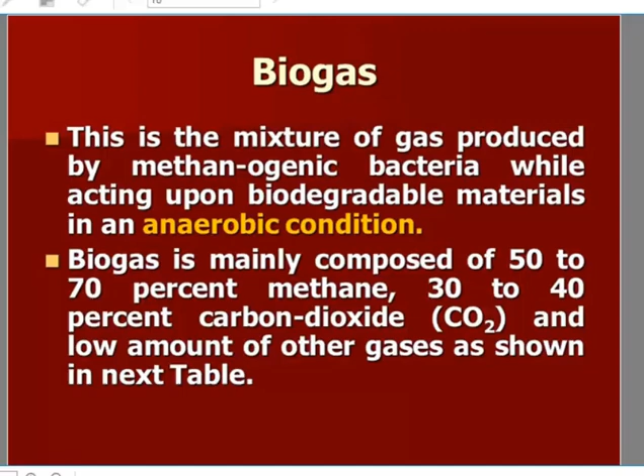One more thing is that biogas is 20% lighter than air and has an ignition temperature in the range of 650 to 750 degrees centigrade. It is odorless, colorless, burns with a clear blue flame similar to LPG gas, and the calorific value is approximately 20 megajoule per meter cube, burning with 60% efficiency in a conventional biogas stove.

So from the calorific value point of view, it's also having values like that. In charcoal you are having approximately 23 to 33 megajoule per kg calorific value. Producer gas is 3.5 to 5.5 megajoule per meter cube. Biogas I have given here as 20 megajoules, and methane is 36 megajoule per meter cube.

Ethanol is 30 megajoule per kg. Methanol is 23 megajoule per kg.

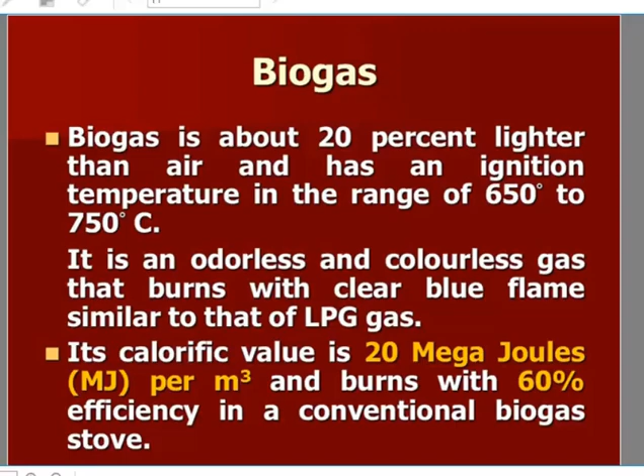Biogas, like liquefied petroleum gas, cannot be liquefied at normal temperature and pressure. Critical temperature is minus 82.1 at 4.71 megapascal pressure.

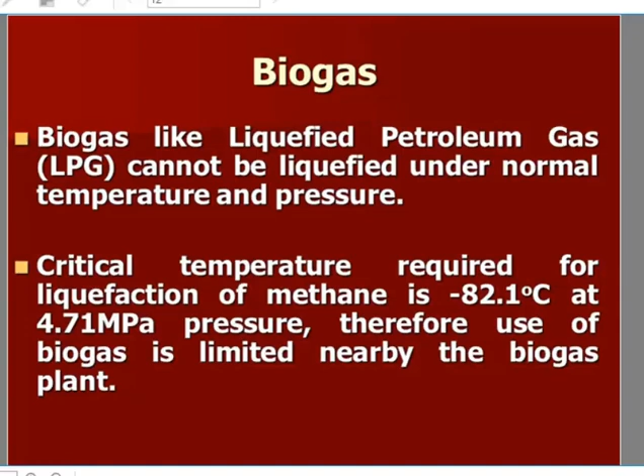Temperature during the process must be 30 to 35 degrees centigrade. pH must be 6.8 to 7.5. C by N ratio should be 20 to 30, and solid content 8 to 10%. Retention time is 20 to 50 days, and it varies from place to place.

So like that, when we are going to have a biogas plant, we have to use the unit. Right now we are also having ready-made available biogas units, made of plastic material and other things, but generally we have to put it into the earth, approximately some feet deep, and then there are several models: fixed dome type, floating dome type, Deenbandhu model. So then we have to connect that to the source.

Every day we have to put the stock in it, like the cow dung cake. So when we are having cow dung, in my earlier lecture I have discussed about the cow dung dried cake which can be used in traditional chulas, which are not good, as a lot of greenhouse gases go into the atmosphere.

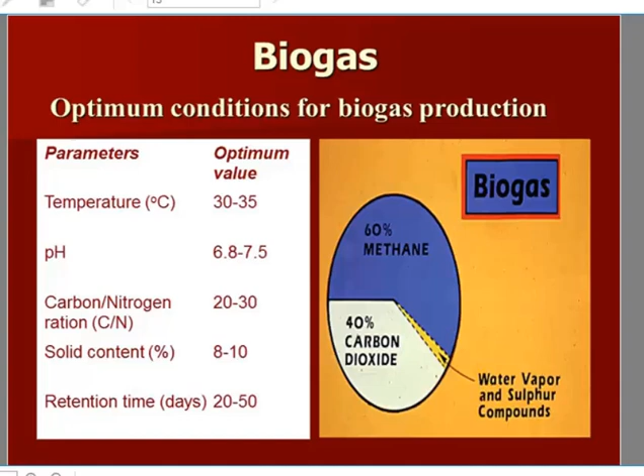Commonly used feed material for biogas generation includes animal waste, human waste, agriculture waste, waste of aquatic organisms, and industrial waste such as from sugar factories, tanneries, paper mills, etc.

If your kitchen area, like in mess areas or hostels in an industrial area, we can connect such areas to the biogas unit. After meals, lunch, dinner, breakfast, a lot of food generally goes to waste, and we have to collect this food and throw it out somewhere for feeding to animals, so that two or three people go and throw it where animals can eat it.

If not like that, you have to think about something else. In a traditional home, if you have cattle or buffalo, whatever you have, you put whatever waste material you have into the pot every day, and after 4-5 days when a good quantity is collected, you mix it with the food of the animals, so that waste material can be used as feedstock for the animals.

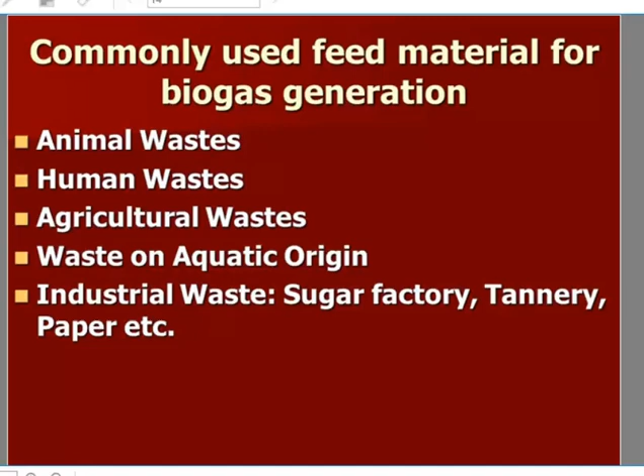In the next slide you can see biogas production potential from different wastes. For cattle dung, biogas production per kg is 40 liters, and methane content in biogas is written here as percentage. So cattle dung gives 40 liters per kg with 60% methane content.

Green leaves and twigs give 100 liters per kg with 65% methane. Food waste gives 160. Bamboo dust gives this amount, and fruit waste gives this amount. Think about the fruit waste number, and now connect this to the municipal corporation.

Every day we are getting lot of food for the selling purpose in the local mandis. Every district headquarter has a big mandi, a place where they sell the product. The product first goes there, and then from that place it is sold to persons. Lot of businessmen dealing in it will go and collect, buy, and provide it to the town areas.

And after that you can see a lot of waste, like in case of banana - you take the banana, eat it, and then put the banana material after eating on the road or nearby corners. So like that, the municipal fellow has to go there and collect it.

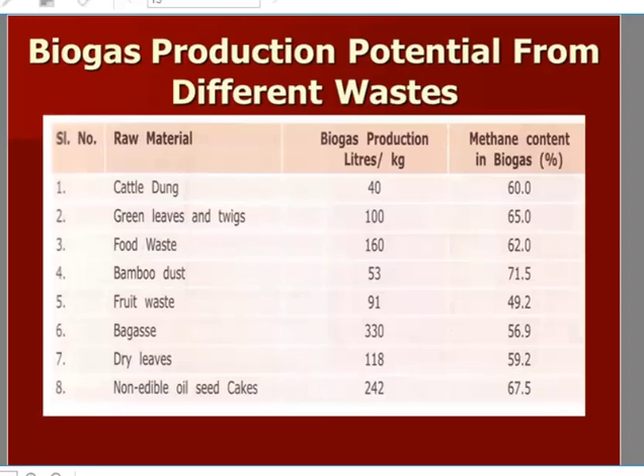Next is power generation. Biogas can partially replace diesel to run the IC, internal combustion engine, for water pumping, and small industries like flour mill, sawmill, oil mill, etc. Biogas can similarly be used to produce electricity. Dual fuel engines using biogas and 20% diesel are nowadays gaining importance.

Second thing is that on a few websites I had seen that biogas can be used in DG sets. It's small scale, like at your home, suppose you are having biogas production like that.

I had seen somewhere they are having lots of plant growth. There is a two-story building, and on the roof they have lots of plants, and they collect the plant leaves and woody material from near the homes, and have a biogas model on top of the roof. They feed it in, and after feeding the biogas production continuously goes on, so they use that biogas to run their DG set, and that DG set produces electricity that can be used.

First thing. Second thing is that whatever gas is there can be used for cooking purposes. That is a two-way connection - one biogas production is there, then they use the biogas, otherwise they can switch to the LPG, and the stove is the same.

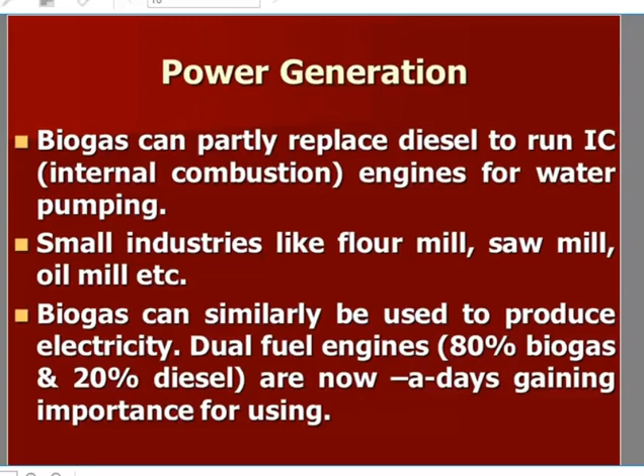So now the biogas requirement for power generation, lighting purpose, that is 200 candle power, 40-watt bulb, two mantle, in the village area where there is a shortage of power. So for that, what they have to do? They have to use that biogas in their Petromax. If you remember, in the villages we used the Petromax.

If you go 20-25 years before, in India in the class two towns, class A, class B, class C, in B or C class towns, the electricity was not proper. So everybody was having the Petromax, based on LPG, and we had to go to the shop. They had so many shops, so you just go and replace the cylinder. That was a 1.2 kg cylinder, and you have to use a mantle in it to solve your electricity issues. If there is no power, you have to burn it.

As soon as the power goes, the matchbox is right there, you light it, and the whole house gets light from it. That was a very common practice, I used to do this too, because we have to do our homework, and during night time if there is no power, then how to do it? That's why we had such kind of preparation, and everybody was having the same. Each household had such kind of arrangement, and some even had two or three.

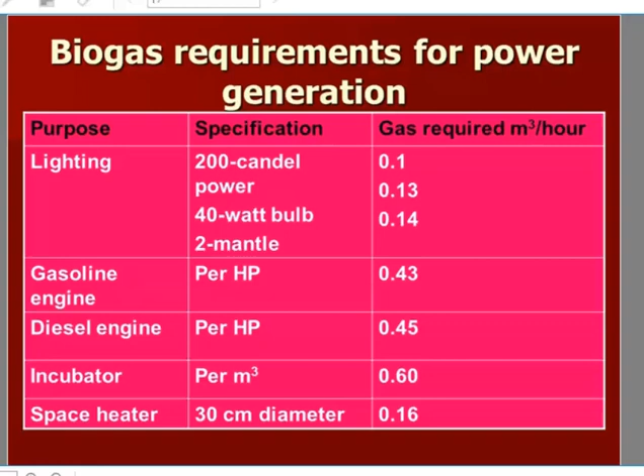Okay, second thing is this diesel engine. Okay, going to the next one. So this is very important. Now I will go to another one, guy.

The important thing is, as I told, when a person goes to collect the cow dung cake, I'm talking about a village area, rural area. If you go there, they have to prepare their meal with the help of the traditional chulha, a device made of bricks with a proper arrangement of mud. So then they have to burn wood as well as the cow dung cake. Wood is generally not available all the time, but cow dung cake they have, and many neighbors nearby having cattle also have the cow dung cake.

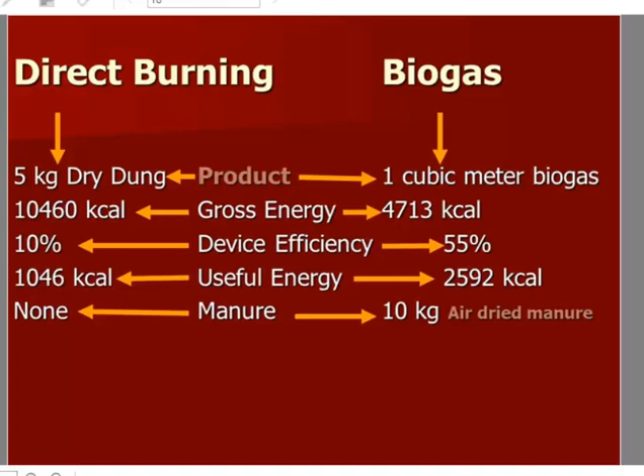That's all. So that slide basically explains the difference between direct burning and using cow dung in terms of biogas. So what is the major difference in both cases?

I heard that name when I was just in 5th or 6th standard. One of my friends had a biogas installation at their home. They had a very big area, and they had servants for cattle arrangement. And then my friend told me they were going to have the gobar gas. So we just thought about it, and every day I saw the process, how they did it. Finally, when that biogas model was prepared and gas production started, I saw that the area where they kept cattle was now very clean. There was an area they said was the plant, and that is the plant. But at that time I could not understand more than that.

I didn't understand much, I just felt there was something called gobar gas. But later on we understood it. So many persons in urban areas are also having such kind of installation, and in rural areas too.

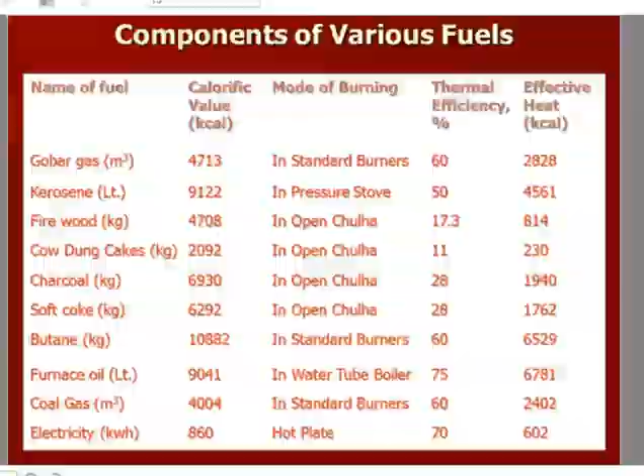So the third point, who can discuss - Anurag Vishwakarma, how can you manage lighting issues with the help of biogas?

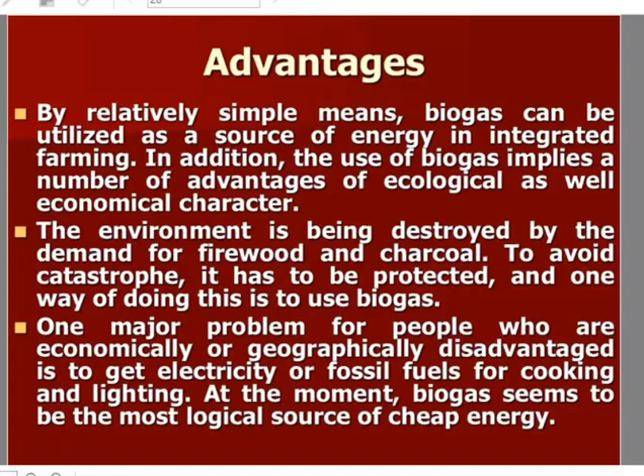You see, still many villages in a very large area of the country, across different states in different places, still have women going out to collect wood for cooking purposes, and then they cook the meal.

During the process, because they have to sit there, they have to inhale such COx, SOx gases, which are not good for the body. That can be very dangerous for their health.

If we solve this problem, we can have more plants because we are not cutting plants for this purpose. Forestation will increase and we can plant more, because we have to think about what kind of sources we need to feed such a biogas model.

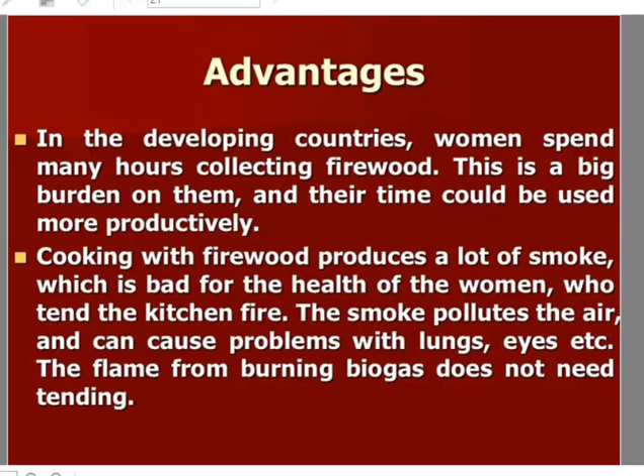So the last one is the C by N ratio - the carbon to nitrogen ratio. The relationship between the amount of carbon and nitrogen present in the organic material is expressed in terms of the carbon/nitrogen ratio. The C by N ratio should be 20 to 30, the optimum values for anaerobic digestion. Anaerobic digestion means it occurs without the presence of oxygen - in the absence of oxygen. That's very important.

When the C by N ratio is very high, or sometimes very low, that will impact your gas production, so you have to maintain it very carefully. As a common man, people don't know about the C by N ratio, but whoever installs such a biogas model provides information about what you have to do and what you have not to do. These are the two important things.